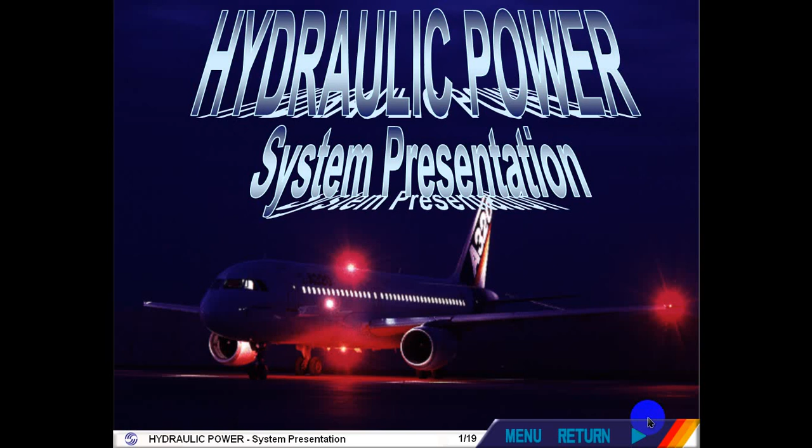The A320 family has three independent hydraulic systems: green, yellow and blue. Let's look at each system in more detail.

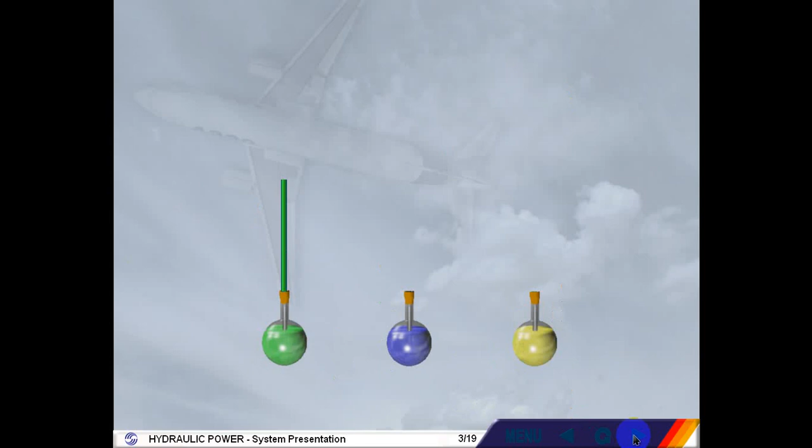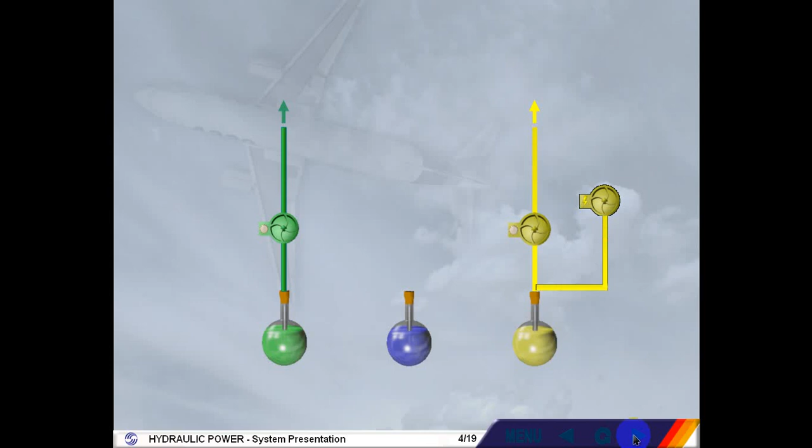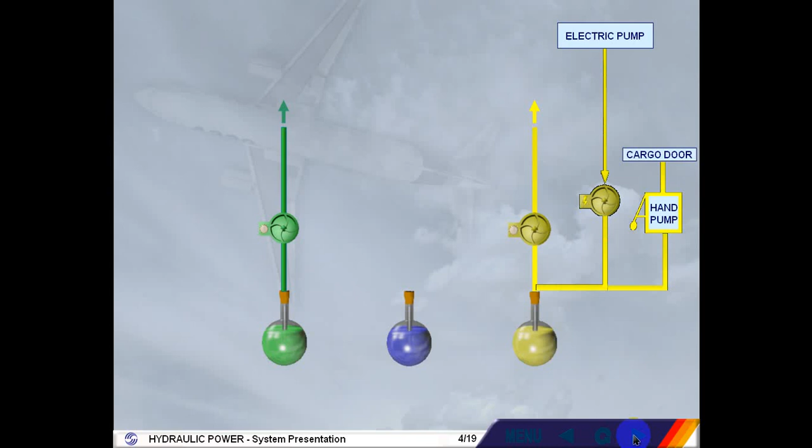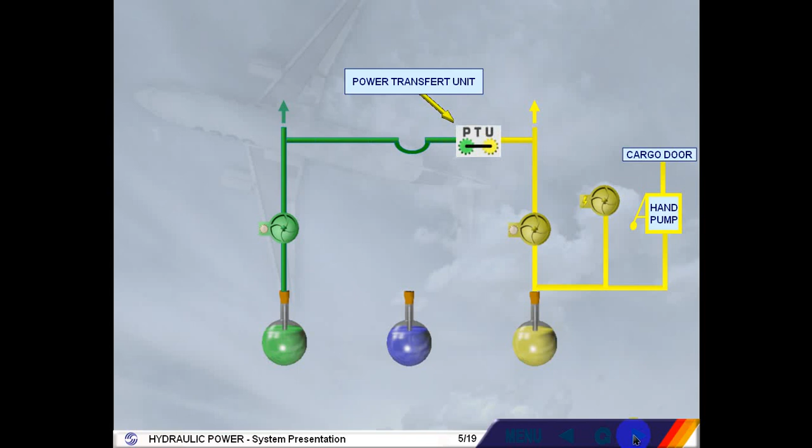The green and yellow hydraulic systems are each pressurized by an engine-driven pump. The yellow hydraulic system can also be pressurized by an electric pump, used on the ground when engines are stopped, or by a hand pump, used by crew members to operate the cargo doors when no electrical power is available. A power transfer unit, PTU, enables the green and yellow systems to pressurize each other automatically.

Fire shut-off valves are located between the reservoirs and the engine-driven pumps. They are controlled by the engine fire push-button switches.

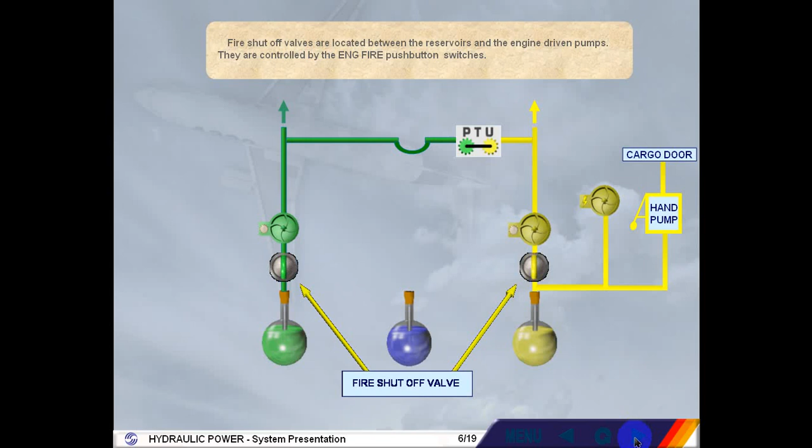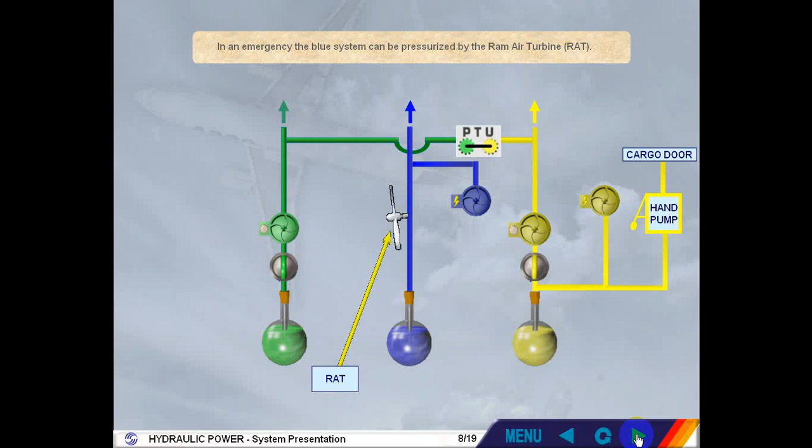The blue hydraulic system is pressurized by an electric pump. In an emergency, the blue system can be pressurized by the ram air turbine, RAT. Each hydraulic system delivers a constant pressure to the users.

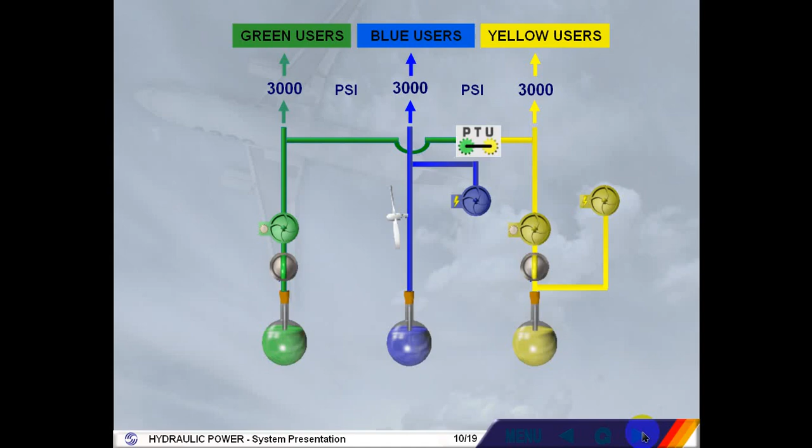The components we have talked about are displayed on the ECAM hydraulic page, except the hand pump on the yellow system.

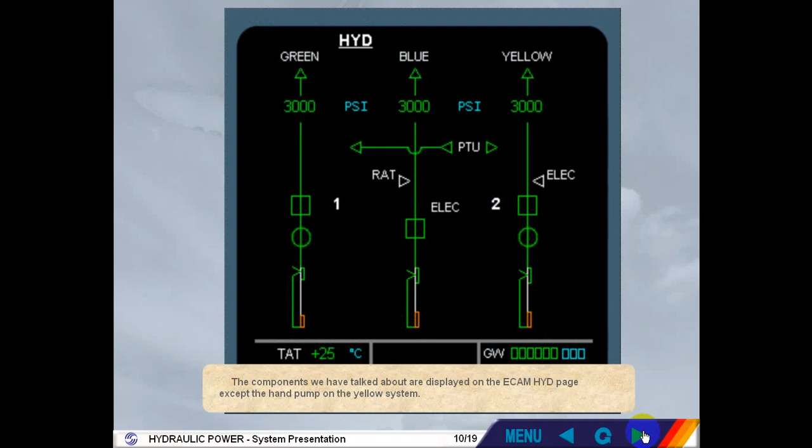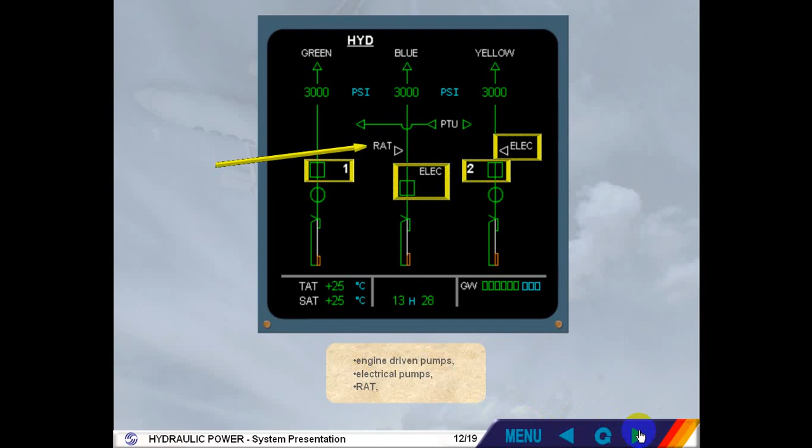Let's briefly review the basic system using the ECAM hydraulic page: reservoirs, fire shut-off valves, engine-driven pumps, electrical pumps, RAT, PTU, pressure indications.

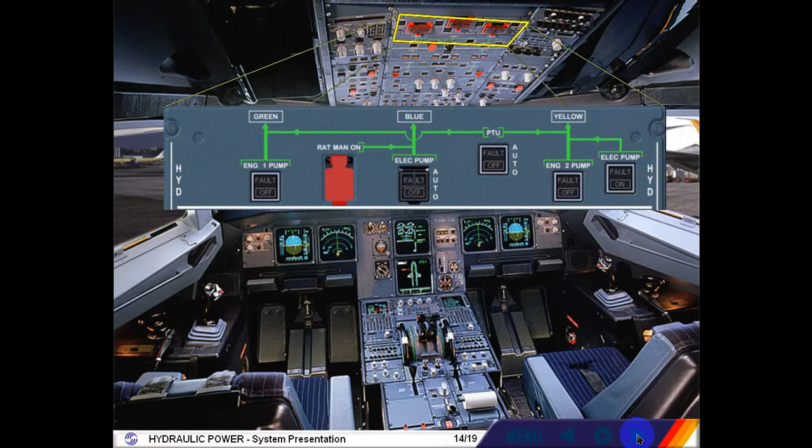The controls of all the components we have talked about are located on the overhead hydraulic control panel. Let's now compare the ECAM hydraulic page with this panel.

The hydraulic system is fully automatic. However, each pump and the PTU have an associated push-button switch for abnormal operation.

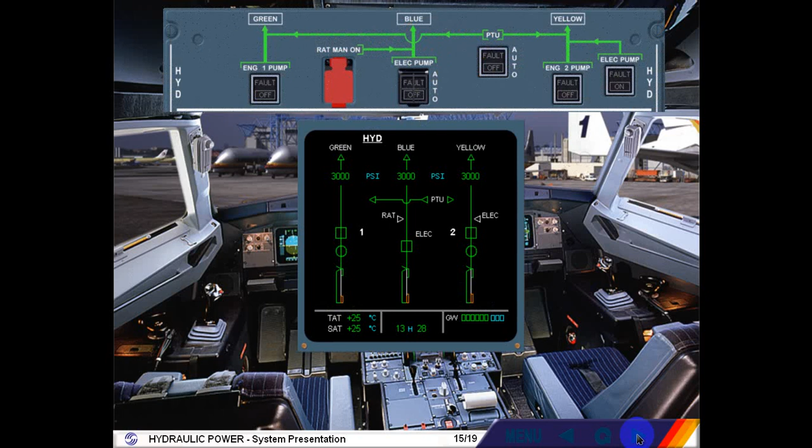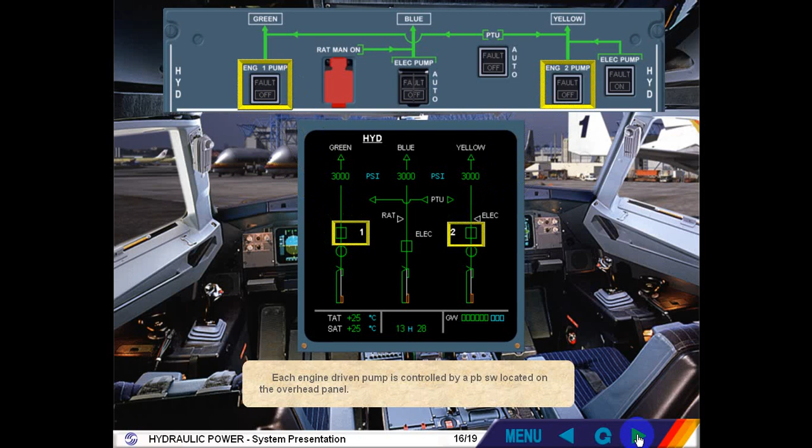Each engine-driven pump is controlled by a push-button switch located on the overhead panel. Each electrical pump is controlled by a push-button switch. The PTU is controlled by a push-button switch. The RAT may be extended manually by using this guarded push-button switch.

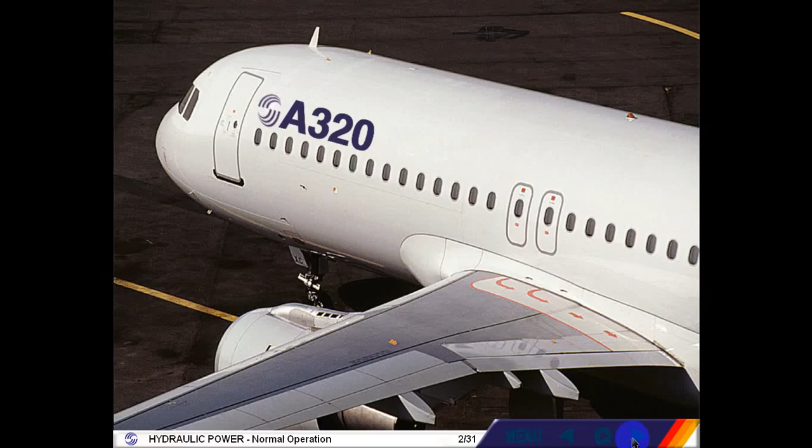Let's look at things pilots need to know about the hydraulic system during normal operation. The hydraulic system is fully automatic during normal operation.

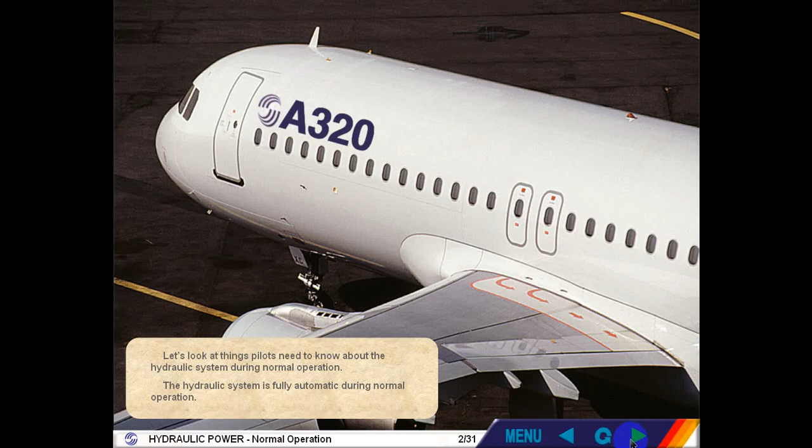During preliminary cockpit preparation, do not pressurize the hydraulic system without clearance from ground crew.

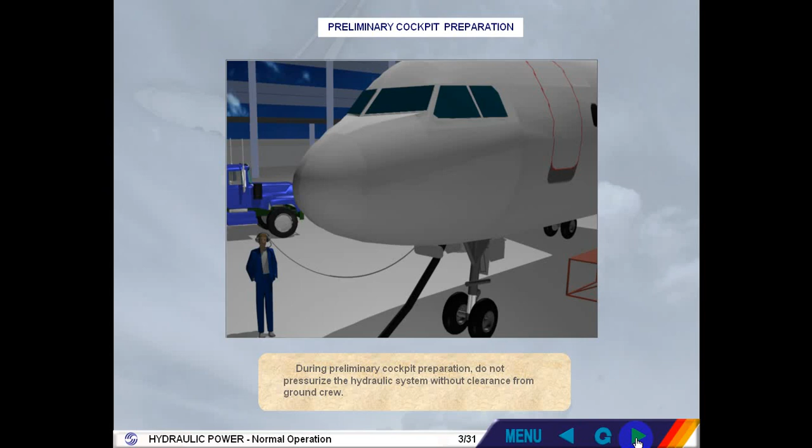One thing to do in this phase of the flight is to look at the ECAM hydraulic page to check the fluid level. At this moment, external power is applied and APU is running. Select the ECAM hydraulic page on the ECAM control panel, ECP.

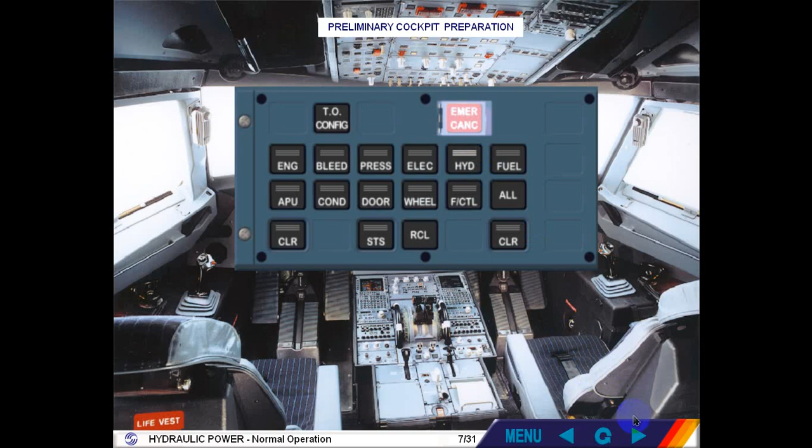The hydraulic fluid quantity information is displayed at the bottom of the hydraulic page. The green rectangles shown by the arrows represent the normal filling range. The fill level indicators show the actual fluid level. You can see that the actual fluid level is in the normal filling range.

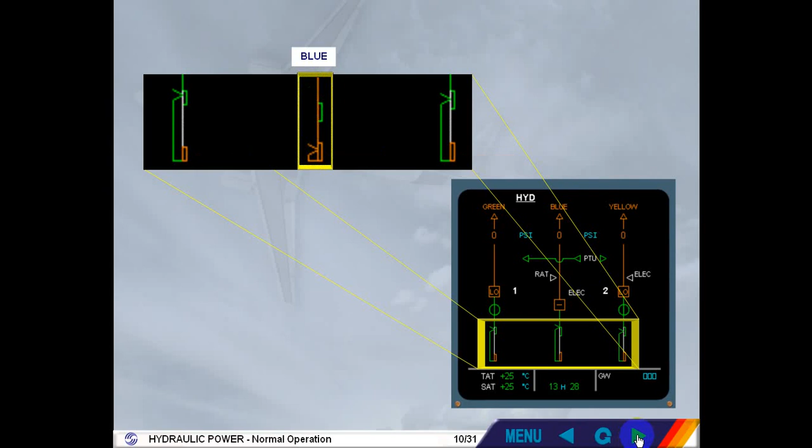This indication is green unless the fluid level drops below the warning level, in which case it becomes amber, as shown in the blue hydraulic system. Another thing you check during the initial cockpit preparation is that all lights on the hydraulic panel are extinguished.

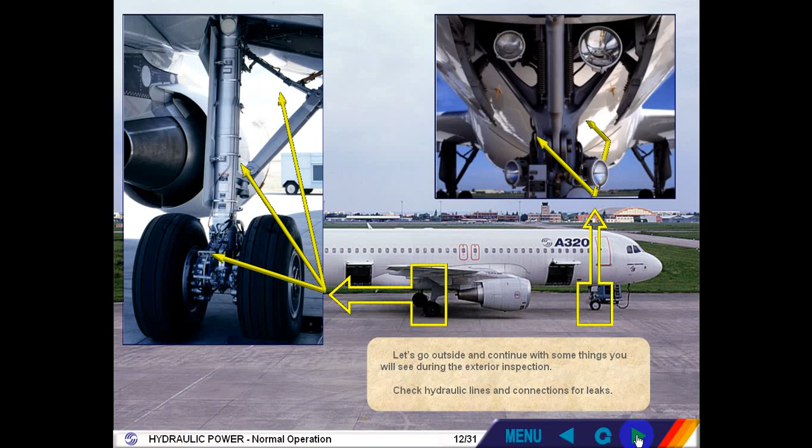Let's go outside and continue with some things you will see during the exterior inspection. Check hydraulic lines and connections for leaks. Make sure that all hydraulic access doors are secured. In this case, the blue hydraulic bay access door is still open.

Opening and closing the cargo doors is part of the normal operation. Let's go to the cockpit to see how it is indicated on the ECAM hydraulic page. The door page is automatically displayed at the gate.

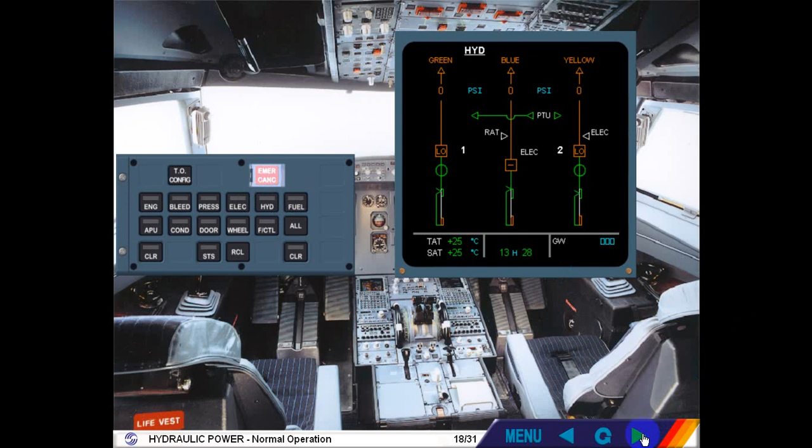To see what happens on the ECAM hydraulic page when a cargo door is opened, select the hydraulic key on the ECP. Call the ECAM hydraulic page. You can notice that the hollow triangle is white, indicating that the yellow electric pump is off.

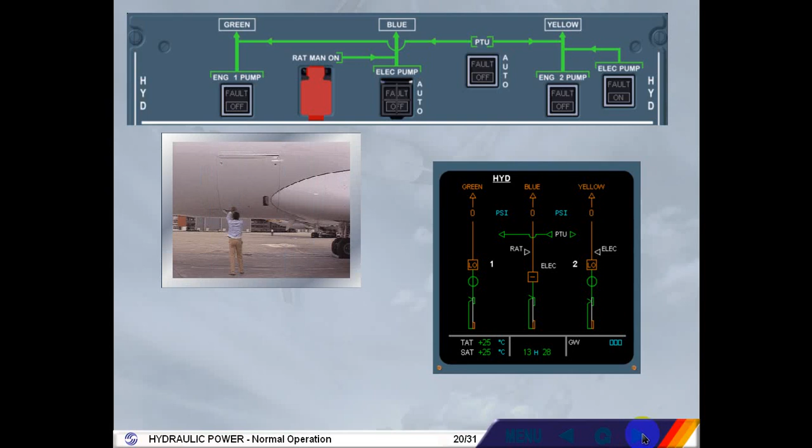As soon as the cargo handle is operated, the yellow electric pump runs automatically. Observe on the ECAM system display page that the yellow hydraulic electric pump triangle has changed from hollow white to solid green, indicating that it is running.

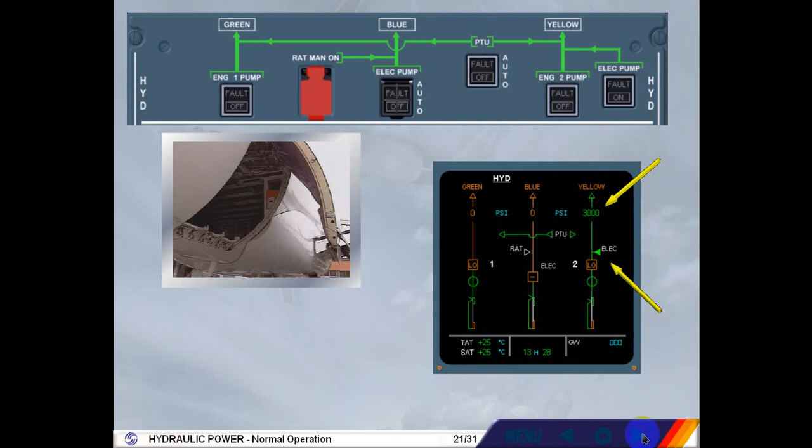The yellow system pressure has increased from 0 amber to 3000 green, providing pressure to operate the doors. The yellow system is not fully pressurized, as indicated by the system identification remaining amber.

As soon as the door is fully open, the yellow electric pump stops. Notice that the yellow electric pump is now hollow white. The pressure has dropped to 0, indicating that the system is totally depressurized. The process will be the same during the cargo door closure.

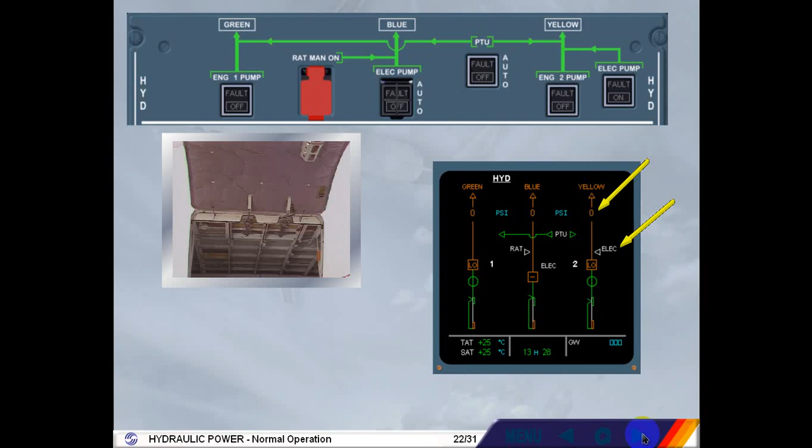As you already know, during engine start, the engine page is displayed on the ECAM system display. Here, for training purposes, the hydraulic page is displayed to see the automatic operations of the hydraulic system during start, but, more importantly, to learn the indications on the ECAM hydraulic page and their meaning.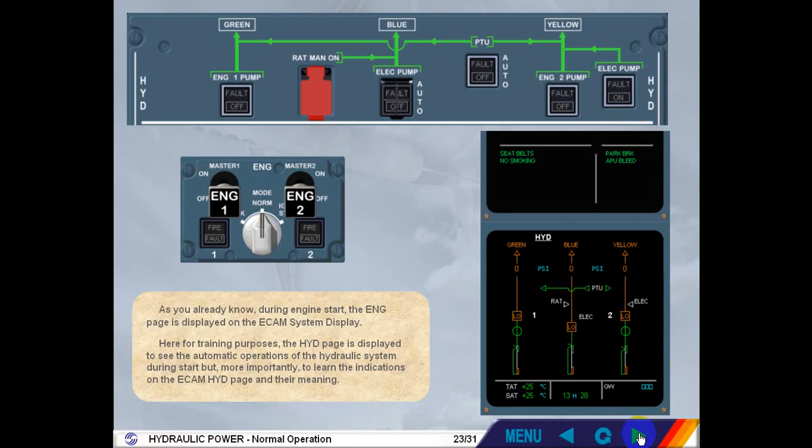We will start engine 2 for you. During this sequence, observe the yellow system. You can notice that the pump's legend becomes amber as soon as the engine mode selector is set to ignition start.

The yellow engine-driven pump changes from LO amber to inline green to indicate that it is starting to pressurize. Yellow pressure increases from 0 amber to the normal operating pressure, which is 3000 psi green. Yellow system identification has changed from amber to white to indicate that the yellow hydraulic system is available as soon as pressure is above 1450 psi.

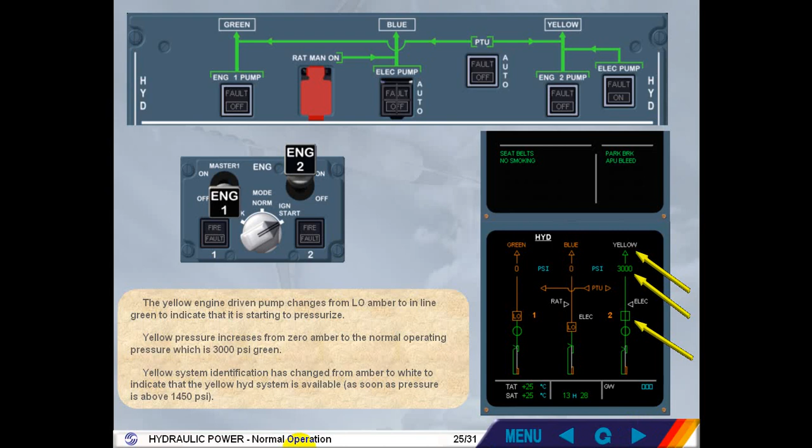Before the end of the first engine start sequence, the blue electric pump starts automatically to pressurize the blue hydraulic system. Then the pump number indication changes from amber to white to indicate that the engine N2 has reached idle.

Observe that the blue electric pump indication is now green inline to indicate that the pump is running and pressurized. The pressure in the blue system is 3000 psi. The blue hydraulic system identification has changed from amber to white to indicate that the blue hydraulic system is available, greater than 1450 psi.

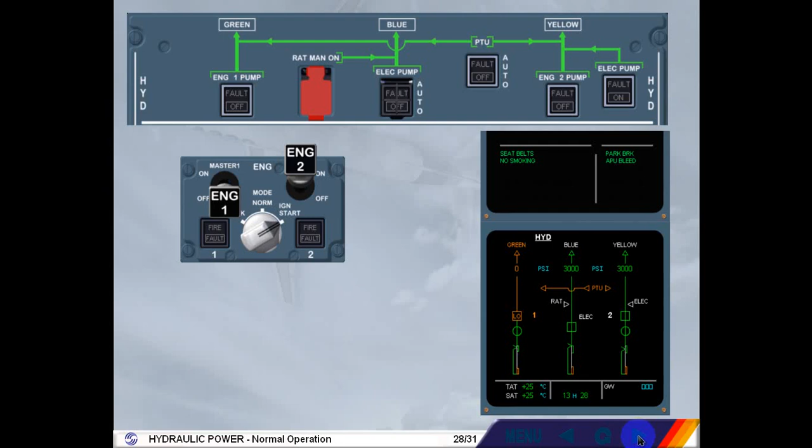Let's now start engine 1. During this sequence, observe the PTU indication as well as green hydraulic system indications. As soon as the second engine start sequence is initiated, the power transfer unit, PTU, is tested.

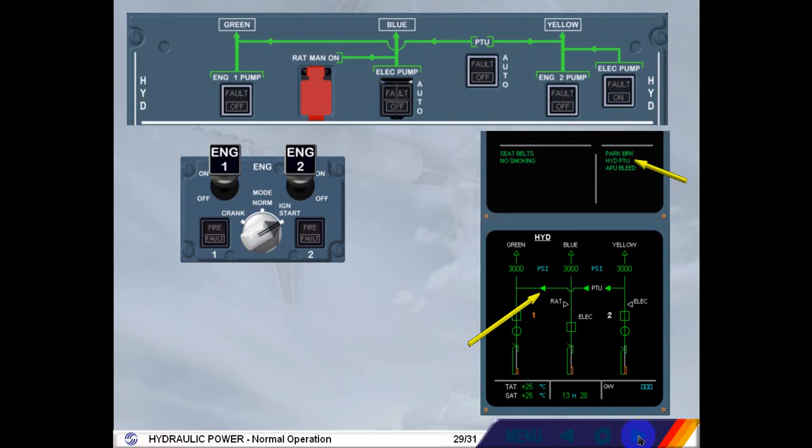Notice that the green PTU line connects the yellow and green systems, pressurizing the green system to 3000 psi. On the engine warning display, the hydraulic PTU memo is displayed. Once the start sequence is complete, the PTU is disconnected and the 3 hydraulic systems are supplied normally. Notice that the hydraulic PTU memo has disappeared.

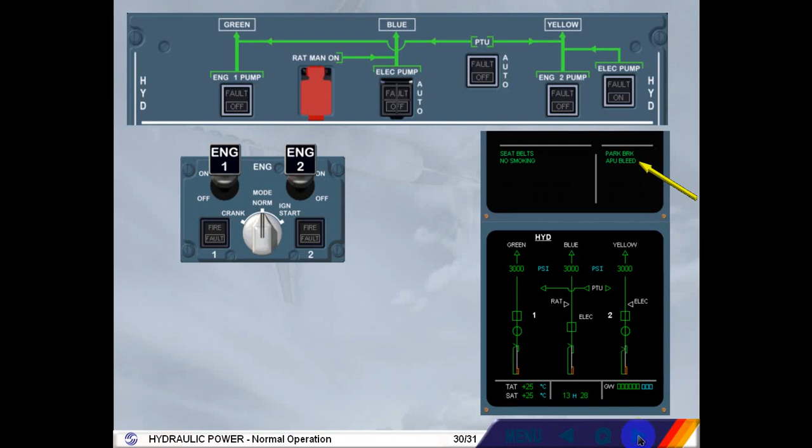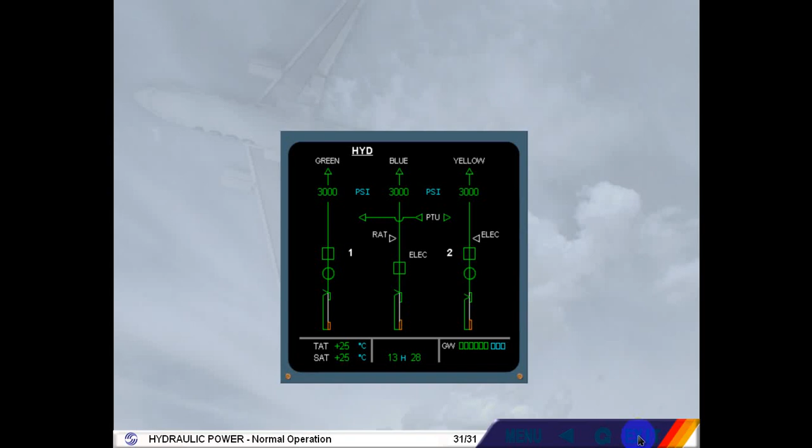We are now about to take off. Notice that the indications on the hydraulic page are normal.

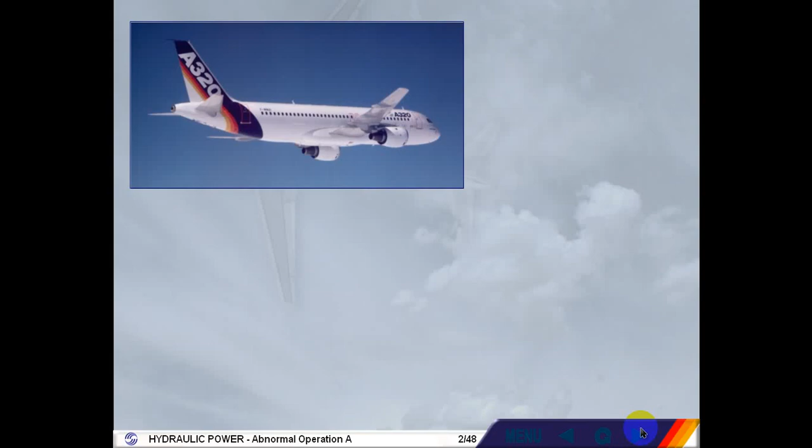This is a demonstration of an in-flight green hydraulic abnormal operation. You are the pilot non-flying. You are in cruise, everything is normal. Click on the forward arrow to activate the failure.

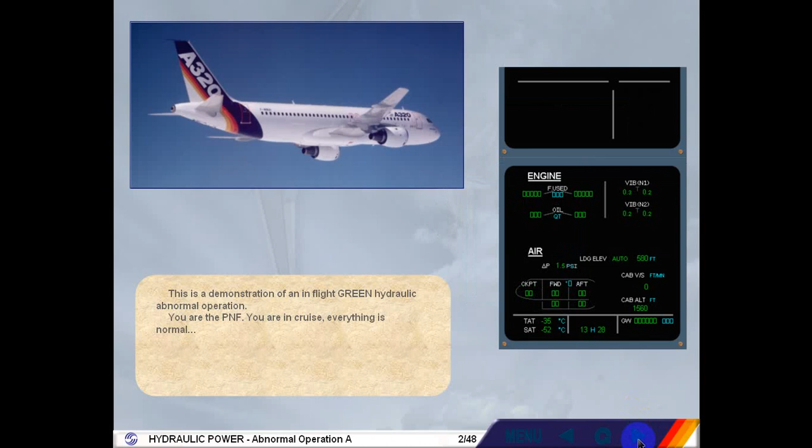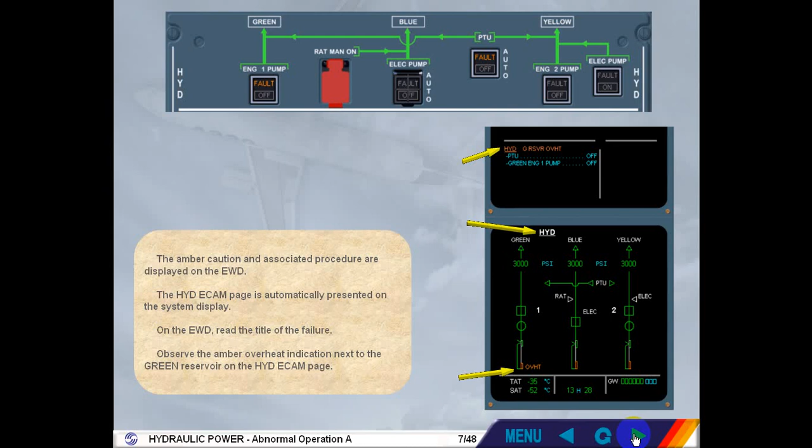On the hydraulic panel, the green engine 1 pump fault and PTU fault lights are illuminated on the push-button switches. These indications provide a cross-check of the ECAM and locate the switches to be actuated in the abnormal procedure.

The pilot flying will ask you to perform the ECAM actions. Perform the first ECAM action. No, please switch off the PTU.

These following indications show that the PTU is switched off: PTU indication in amber on the ECAM hydraulic page, PTU push-button switch white off light on the hydraulic panel.

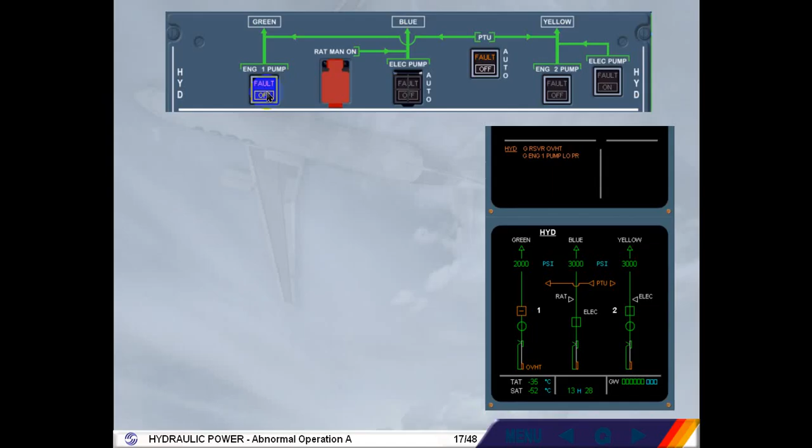Continue ECAM actions. The ECAM caution green engine 1 pump low pressure appears amber on the engine warning display to indicate that the green engine 1 pump is not producing pressure because you switched it off. The green system pressure continues to drop.

The corresponding ECAM caution, green system low pressure, is displayed on the engine warning display to indicate that the green system is no longer pressurized. The failure is boxed to indicate that this is a primary failure, with associated secondary failures indicated by a star in front of the title.

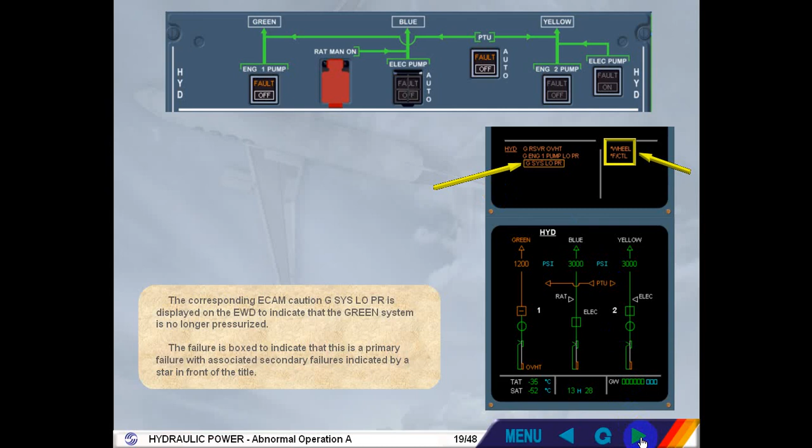At the same time, on the system display, the green system pressure and line change from green to amber to indicate that the green system is no longer pressurized. In addition, the green system indication changes from white to amber, indicating the loss of green system pressure to the users.

The abnormal procedure is complete. After review and confirmation from the pilot flying, clear hydraulic.

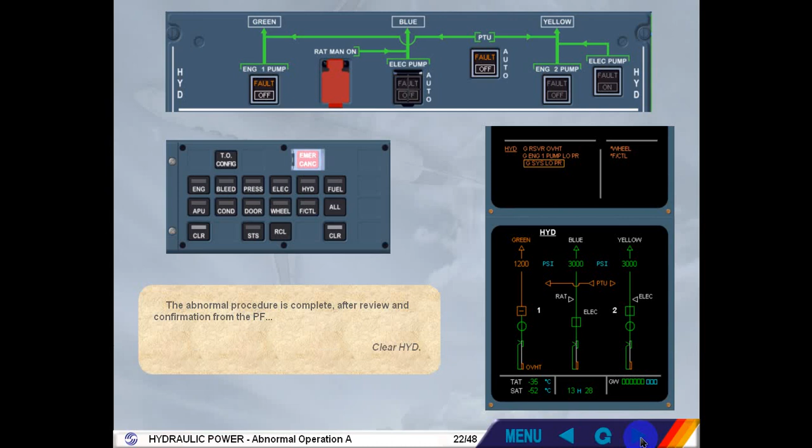The ECAM wheel page is automatically displayed for review. Nose wheel steering and auto brake are inoperative due to the failure of the green hydraulic system.

After review and confirmation from the pilot flying, clear wheel. Observe that the amber wheel secondary failure has disappeared.

The ECAM flight control page is automatically displayed. On the ECAM flight control page, you can see secondary effects of the hydraulic failure. For example, some spoilers are affected by the green system failure. After review and confirmation from the pilot flying, clear flight control.

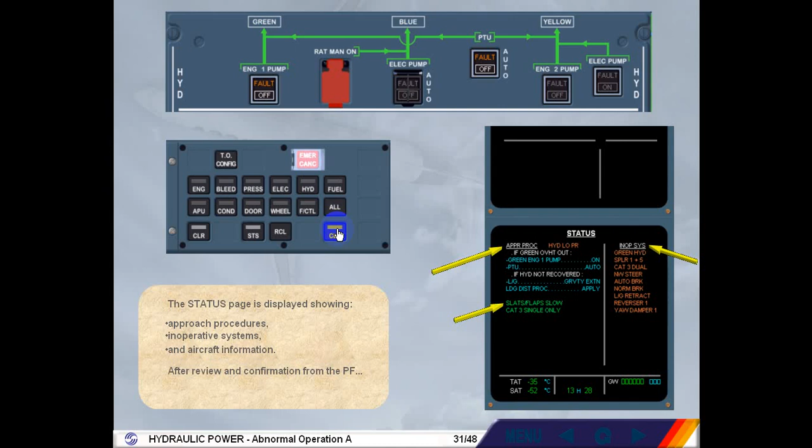The status page is displayed, showing approach procedures, inoperative systems, and aircraft information. After review and confirmation from the pilot flying, clear status. ECAM actions are completed, and the status reminder is displayed on the engine warning display.

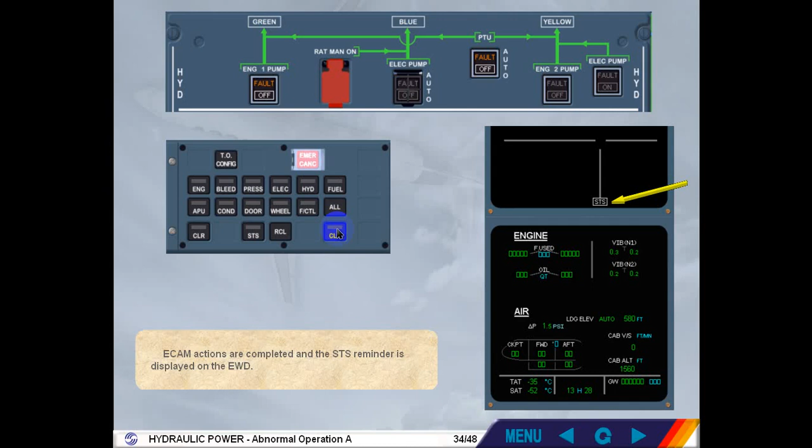During the approach briefing, you will call the status page manually to review the approach procedure. Call status.

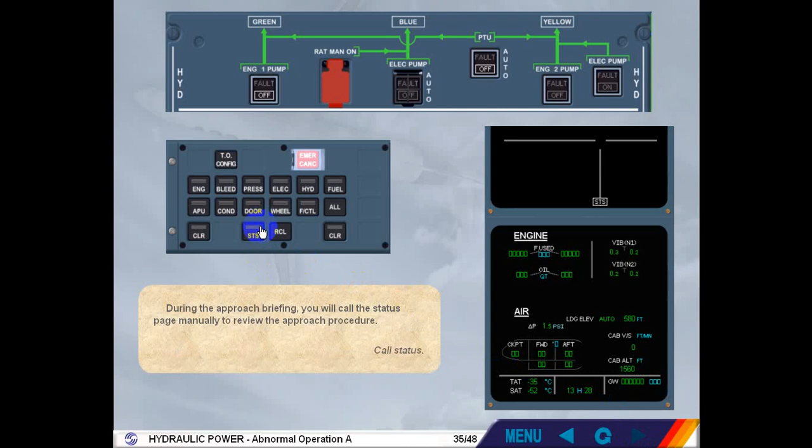Notice that the approach procedure gives two possibilities. Confirm on the overhead panel which possibility applies. Observe that the fault light is extinguished, indicating that the green reservoir overheat no longer exists.

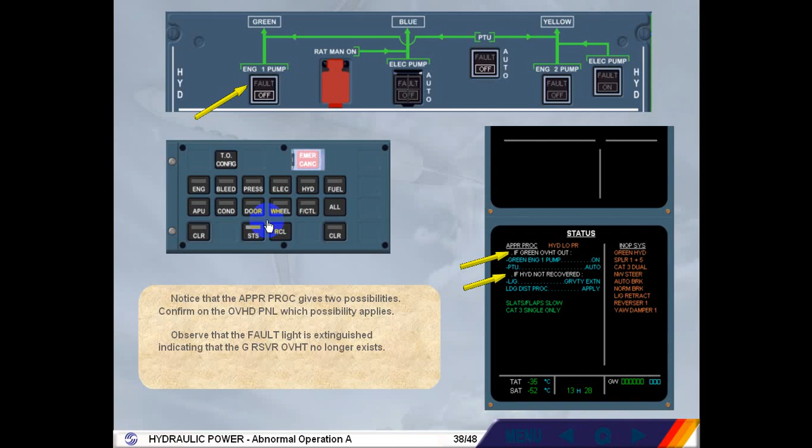Perform the appropriate procedure. Continue applying the procedure. The green hydraulic system is restored.

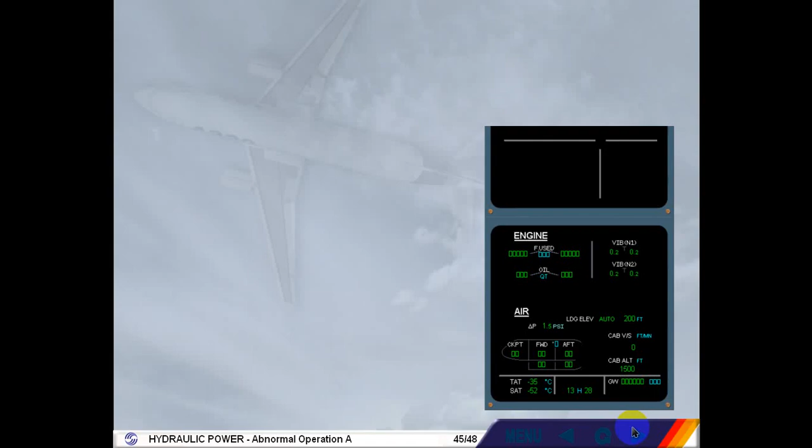The status page shows normal for a few seconds. Then the ECAM system display automatically reverts to the cruise page.

Let's look briefly at another reservoir problem, which can result in a similar situation. This failure is indicated by hydraulic green reservoir low air pressure on the engine warning display, and the display of the amber low air pressure message next to the affected reservoir.

Notice this procedure and the indications are similar to those in the previous example: green reservoir overheat. With this malfunction, it is also possible to recover the system using the approach procedure. We will assume the ECAM actions are complete.

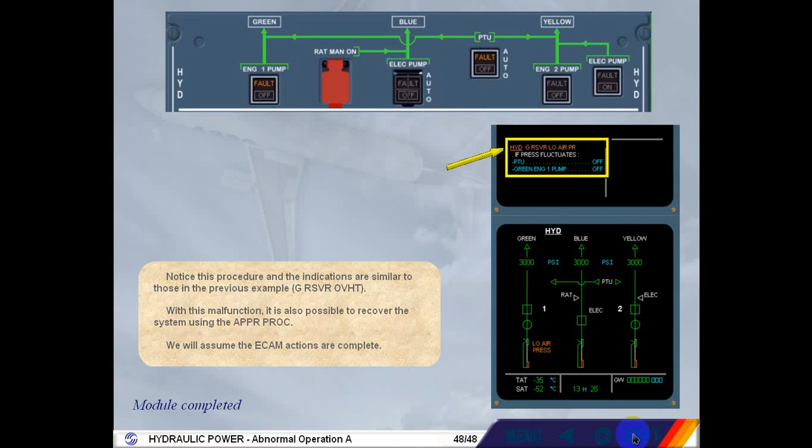This is a demonstration of an in-flight yellow reservoir low level. You are the pilot non-flying. You are in cruise. Everything is normal.

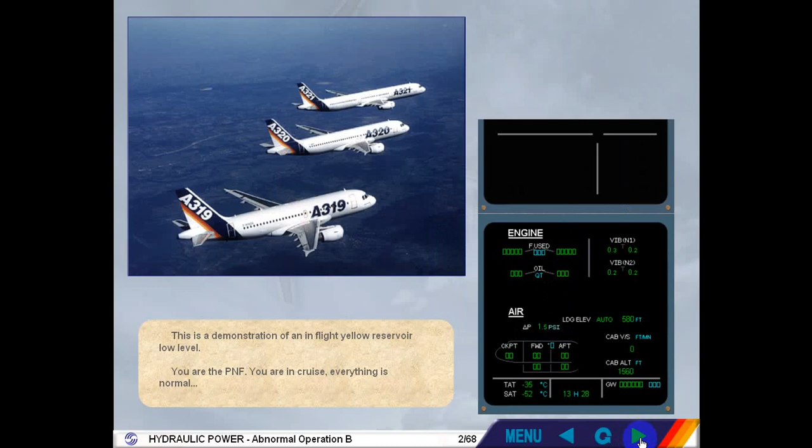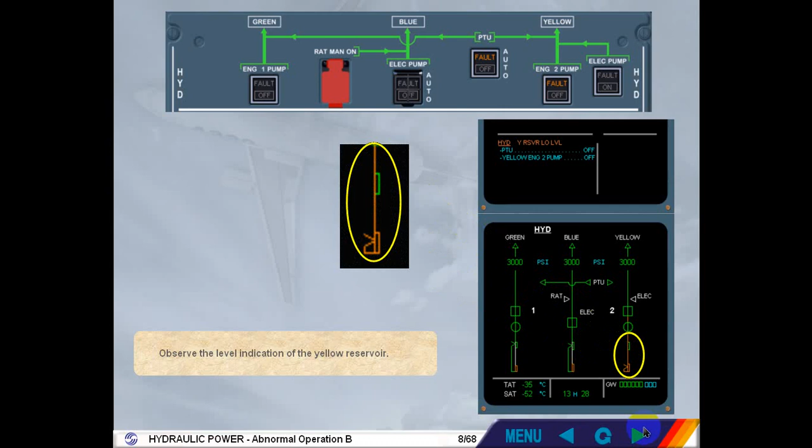On the engine warning display, read the title of the failure. Observe the level indication of the yellow reservoir. Observe the reservoir level indicator has changed to amber because the contents are below the warning level.

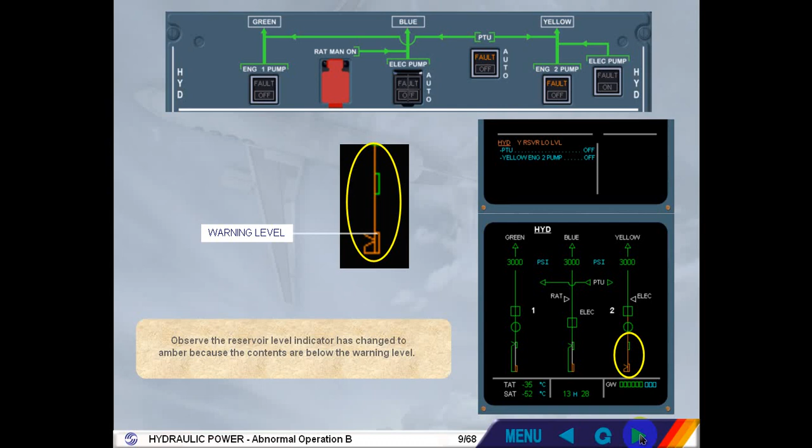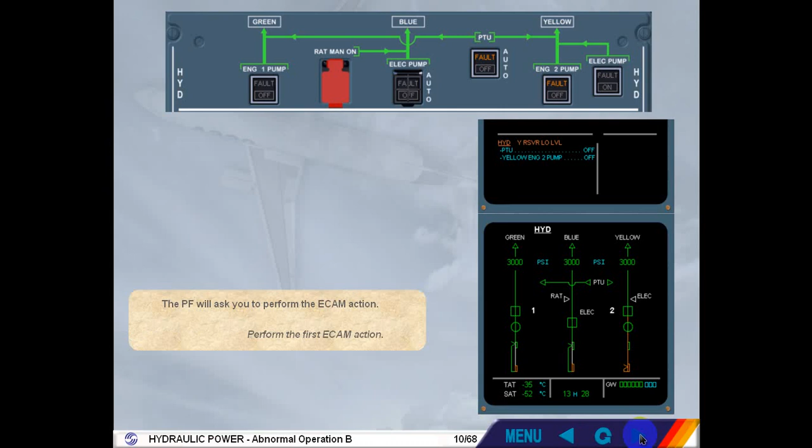The pilot flying will ask you to perform the ECAM action. Perform the first ECAM action. Continue ECAM action.

The following indications show that the yellow engine 2 pump has been switched off: push button switch off light on the hydraulic panel, and yellow engine 2 pump cross line on the ECAM hydraulic page.

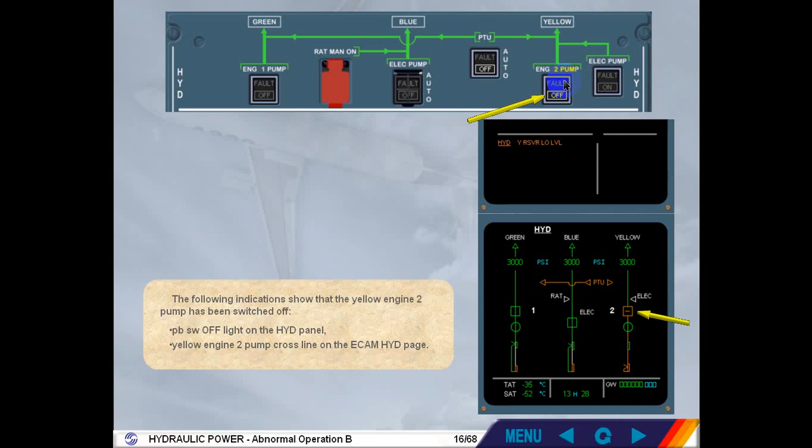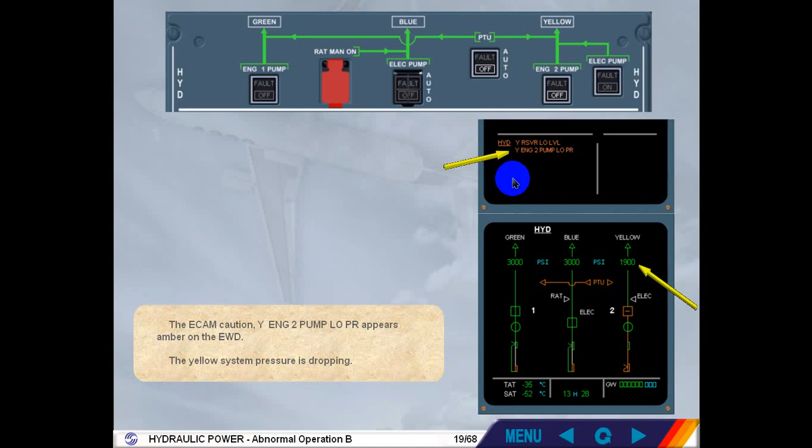The corresponding ECAM caution, yellow system low pressure, is displayed on the engine warning display to indicate that the yellow system is no longer pressurized.

At the same time, on the ECAM hydraulic page, the yellow pressure changes from green to amber. In addition, the yellow system indication changes from white to amber.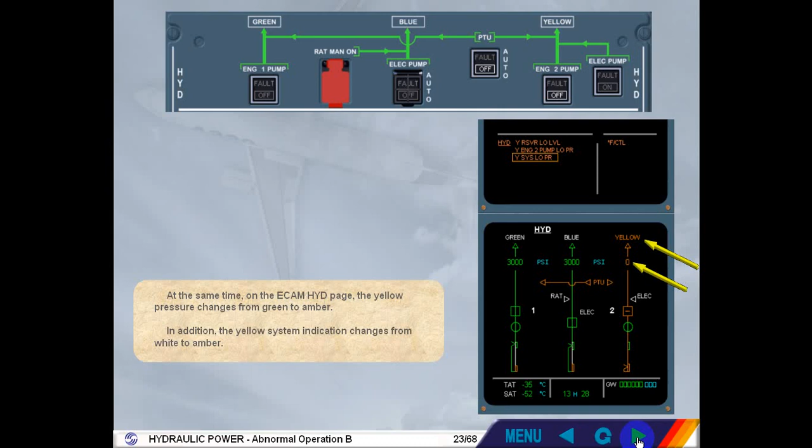The flight control secondary failure is displayed. The abnormal procedure is complete. The hydraulic system is analyzed.

After review and confirmation from the pilot flying, you can clear hydraulic. We will clear hydraulic for you.

The ECAM flight control page is automatically displayed for analysis. We will clear flight control for you.

Now the status page is displayed for review. We will clear status for you. ECAM action completed.

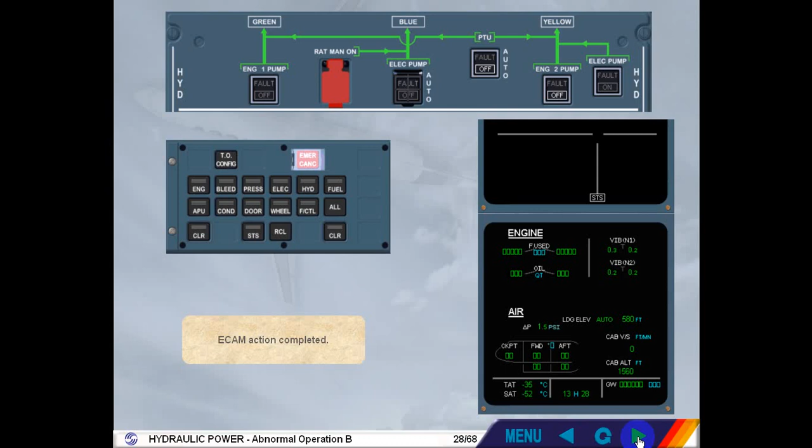We are still in cruise. Let's add a second system failure: blue electrical pump low pressure, which will lead to an emergency condition.

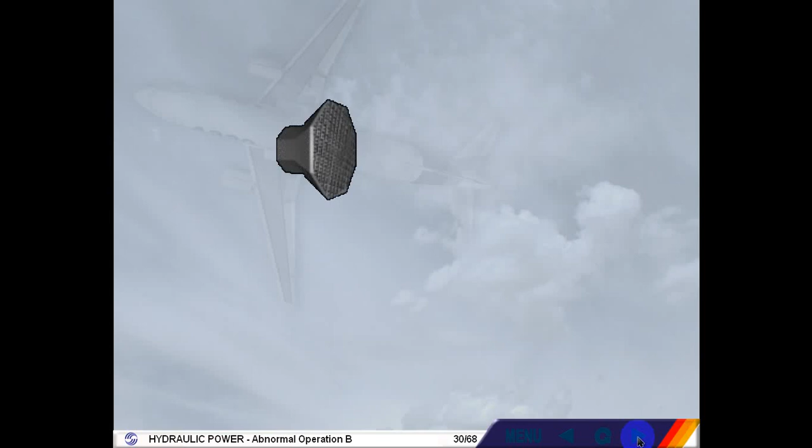On the engine warning display, read the title of the failure. Notice that this is a red warning. In addition, Land ASAP appears in red to indicate the emergency condition.

Observe on the ECAM hydraulic page, the blue electrical pump indication changes from green in line to amber cross line, indicating that the blue electric pump has suddenly failed. Notice the system pressure is below normal limits.

On the hydraulic control panel, the amber fault legend is illuminated in the blue electrical pump push-button switch, which provides a cross-check of the ECAM, the location of the push-button switch.

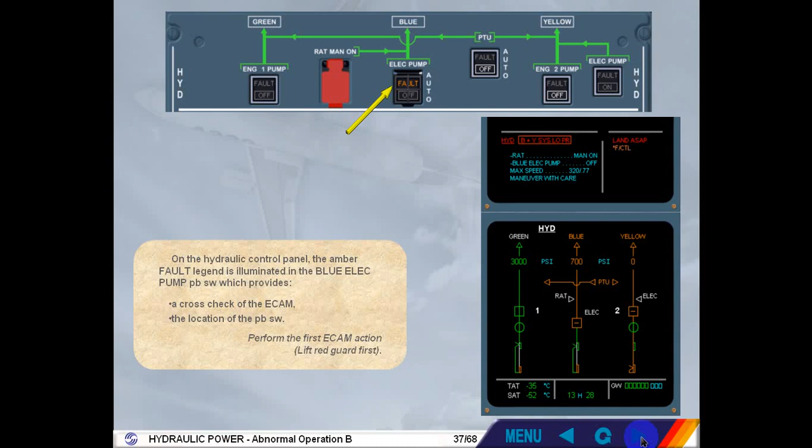Perform the first ECAM action. Lift red guard first. Now, select the RAT manual on push-button switch.

Perform ECAM action. On the ECAM hydraulic page, observe the RAT symbol has changed from hollow white to solid green, indicating that the RAT is extended.

Notice that the pressure has increased. Note, the minimum speed to deploy the RAT is 140 knots.

Once deployed, the RAT can only be restowed by maintenance on the ground. Observe on the ECAM hydraulic page, the pressure of the blue hydraulic system is below 3000 psi.

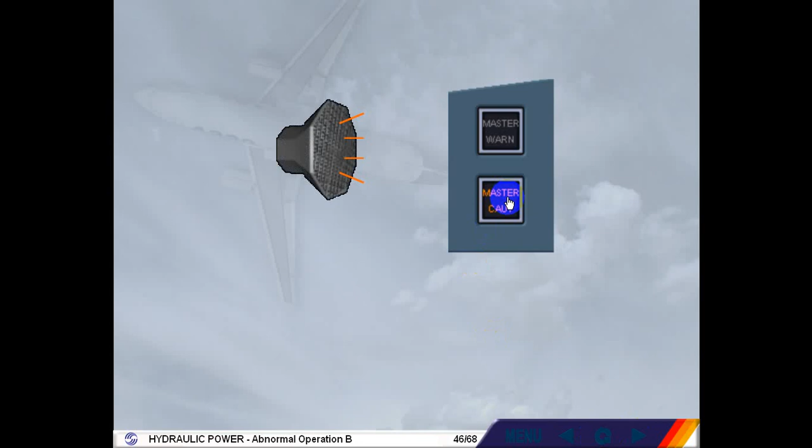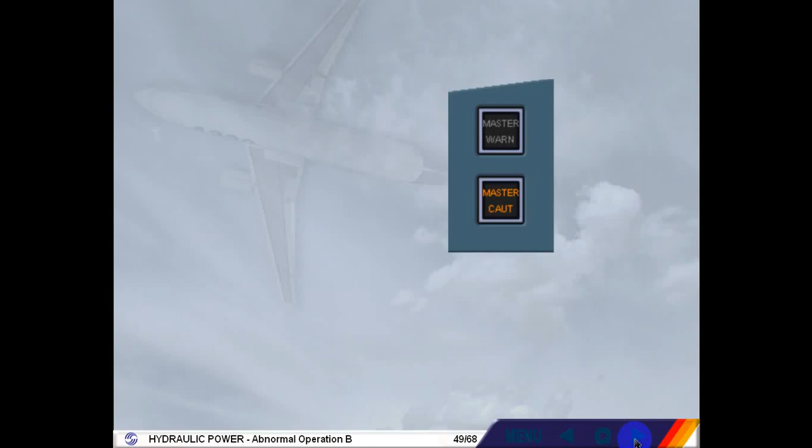As soon as the RAT has pressurized the blue system, the dual hydraulic system low pressure no longer exists, and we are back to a single hydraulic failure situation: yellow system low pressure.

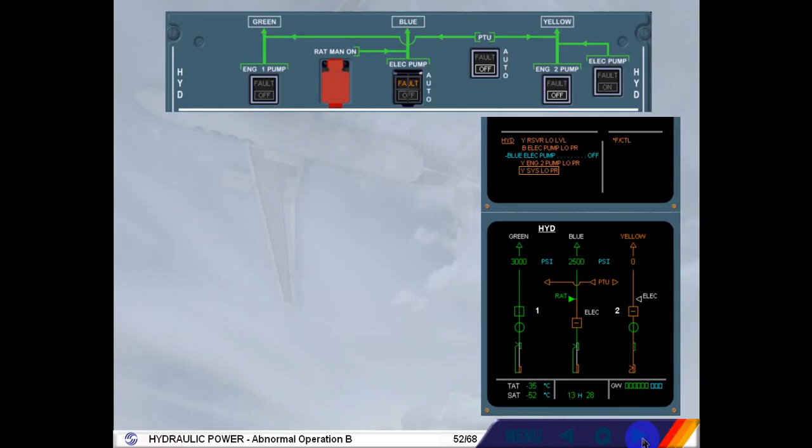Observe that the blue system indication on the ECAM hydraulic page has changed from amber to white. The system is pressurized by the RAT and available.

Perform ECAM action. Lift the guard first. Continue ECAM action.

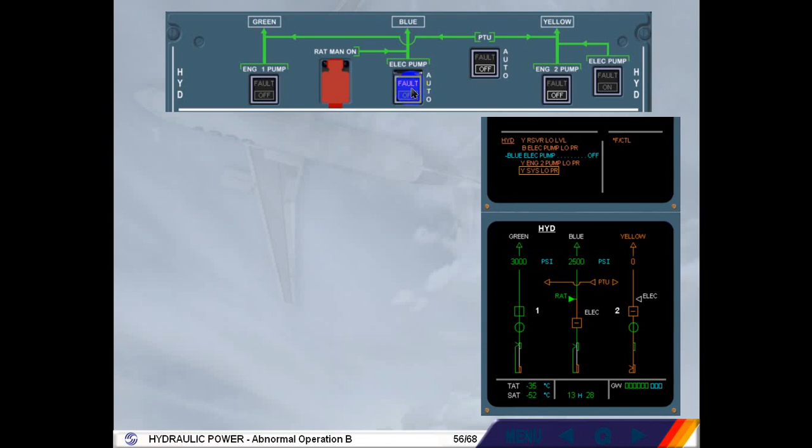The white off legend on the blue electrical pump push-button switch on the hydraulic control panel indicates that blue electrical pump has been switched off.

After review and confirmation from the pilot flying, clear hydraulic.

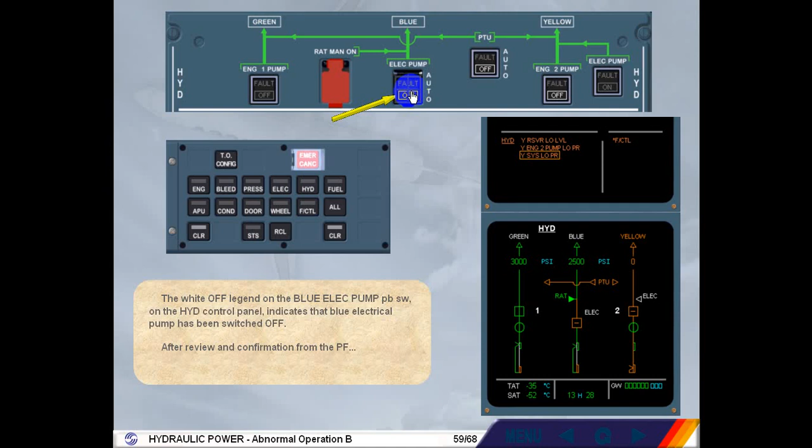The flight control page is automatically displayed to analyze the effects of the primary hydraulic failure. For example, the right elevator is affected by the yellow system low pressure.

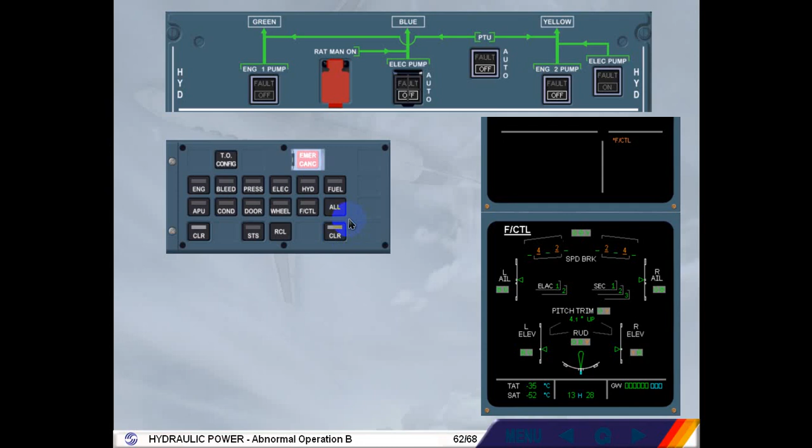Once reviewed and after confirmation from the pilot flying, clear flight control.

Now the status page is displayed for review. Notice RAT out has appeared on the engine warning display. After review and confirmation from the pilot flying, clear status.

This completes the procedure.